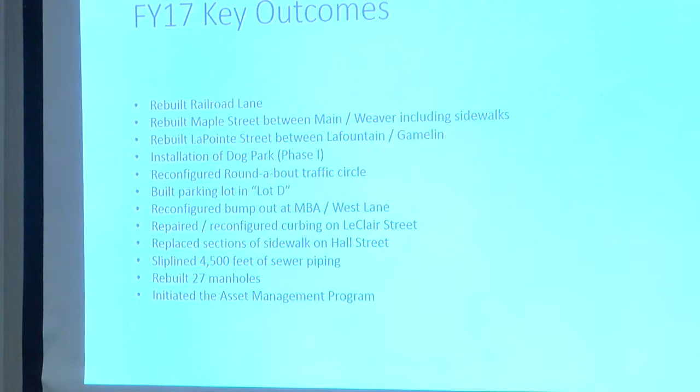For example, rebuilding Railroad Lane. One improvement we made was that the road used to be crowned in the center like any normal road. It's a steep hill, and when it rained, floodwaters would wash out basements and driveways. So when we rebuilt the road, we took those complaints into consideration and regraded it so the water sheds towards the embankment instead. That was a big change, and we haven't had any problems with flooded basements or washed out driveways since then.

Another thing we've done is a lot of our own in-house concrete work now. We used to hire it all out - we'd do the excavation and then bring in a contractor, which typically cost $26 to $30 a linear foot. Because we do it ourselves now, we got the cost down to about $10 a linear foot. So the reconfiguring of MBA and West Lane and the curbing on LeClair Street was all done in-house with our own staff.

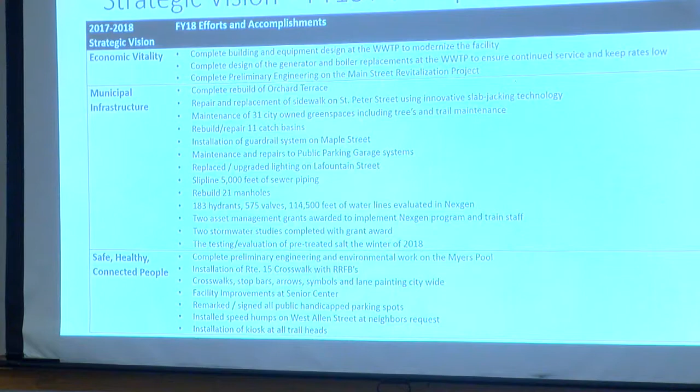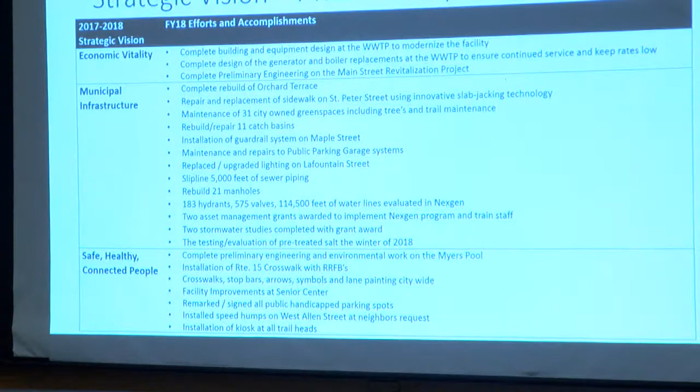One is the complete rebuild of Orchard Terrace. That was done over the summer - June, July, August. It was a success; the three of us managed the contractor from start to finish. We replaced an undersized water main and rebuilt the pavement, which was in very poor condition. We had a lot of positive feedback from residents during the construction process, and we were on schedule and on budget.

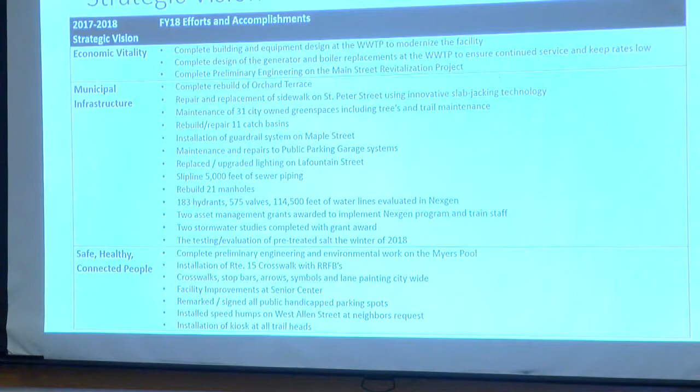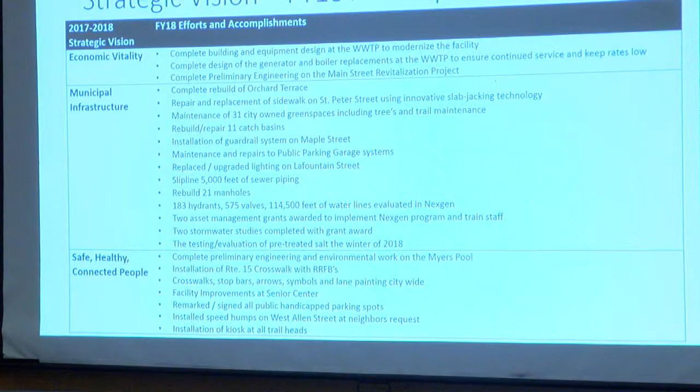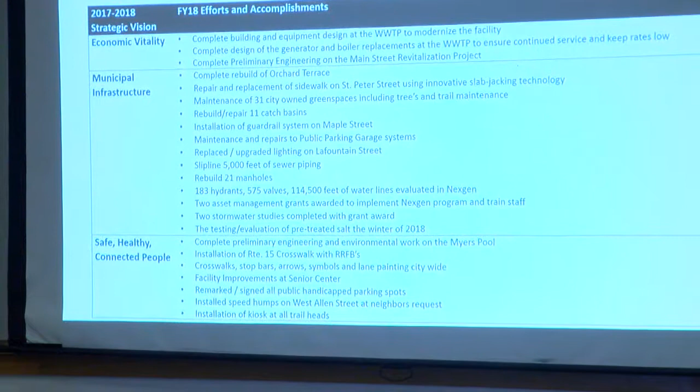Main Street preliminary engineering is ongoing. I'll highlight the drilling we did there - another success. We did about 40 test borings to look at soil, groundwater, bedrock, and contamination in the soil. As you know, this is an urban area with a lot of utilities in the ground, some known, some not. We managed to do all 40 borings without hitting a single utility. That was a major success.

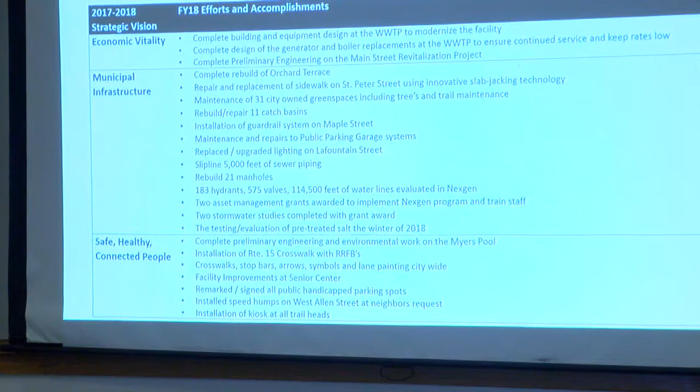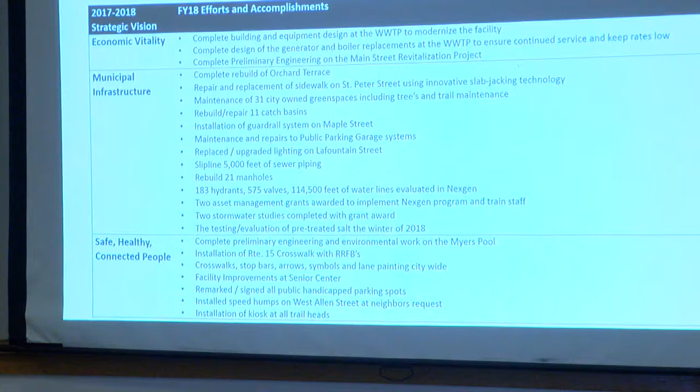The third item I'll highlight is the sidewalk replacement on St. Peter Street. We had a lot of complaints about the sidewalk there, particularly in front of the school - it had settled differential to the curb, creating a trip hazard. We approached several contractors that do slab jacking, something we'd never done before as a city. It involves injecting polyurethane foam under the sidewalk slabs to raise them. It turned out to be a very successful project - 200 feet of sidewalk, and we fixed the differential and corrected the trip hazard for about $4,000. To actually reconstruct and re-pour the concrete sidewalk and curbing would have cost 10 times that, and probably taken 6 weeks, where we completed it in 4 days.

And the last item is the Myers Pool. We're full steam ahead on the engineering design work for that. We've completed the survey and the drilling, and the architect and engineer are currently working on a design, which we may value engineer, but we'll bring forward a cost estimate.

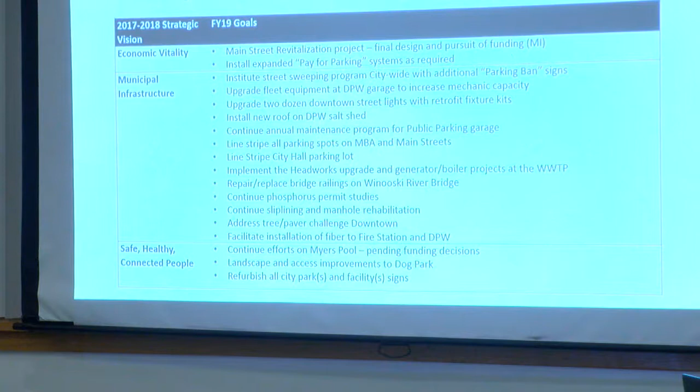We've got 96 pay for parking spots in the city now, and I think code enforcement will be coming forward with some proposals for West Canal and Malletts Bay Avenue for some additional spots in the future.

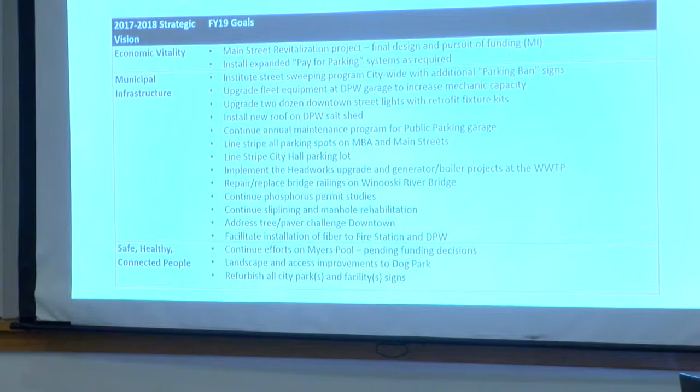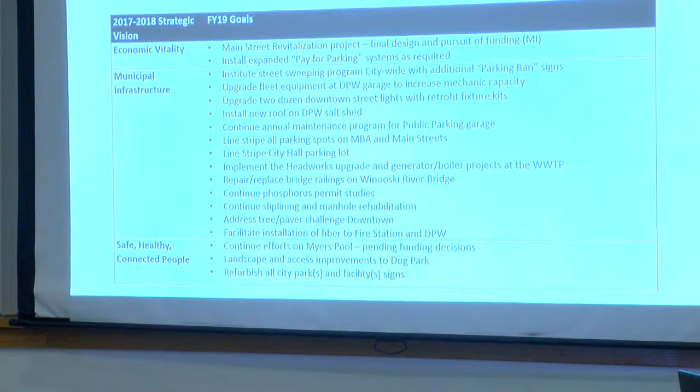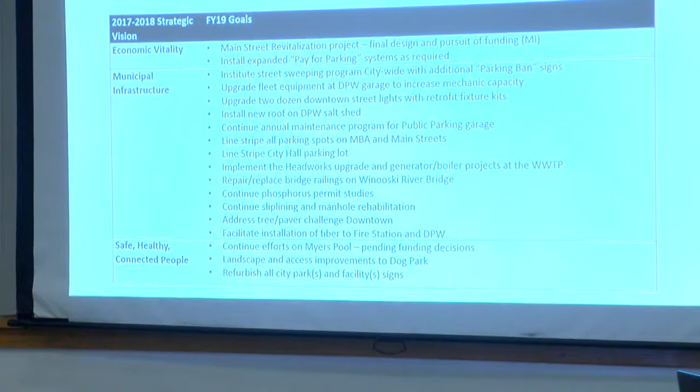Joe and I are working on a street sweeping program. Right now I'm perusing some grant opportunities for a new regenerative sweeper. Ours is dated, it's real maintenance heavy, so we're installing some signs, similar to the parking ban, so we can do street sweeping, breaking the city up into different locations and asking people via the signs not to park so we can get to the curb.

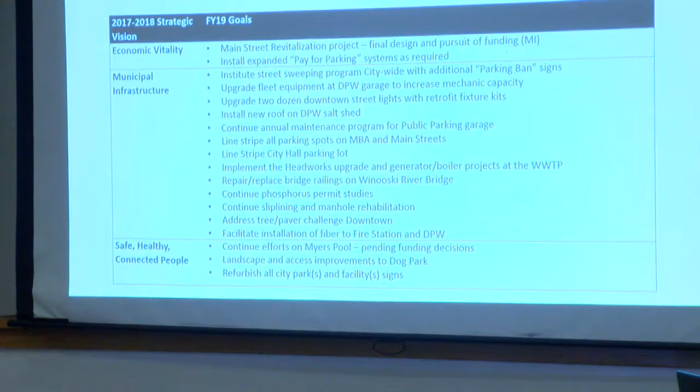We're replacing a dump truck, old number 6. That's the $60,000 that we're spending in CIP in the capital for the general fund.

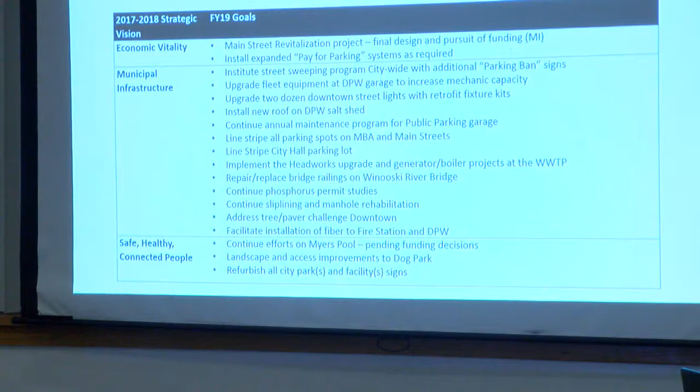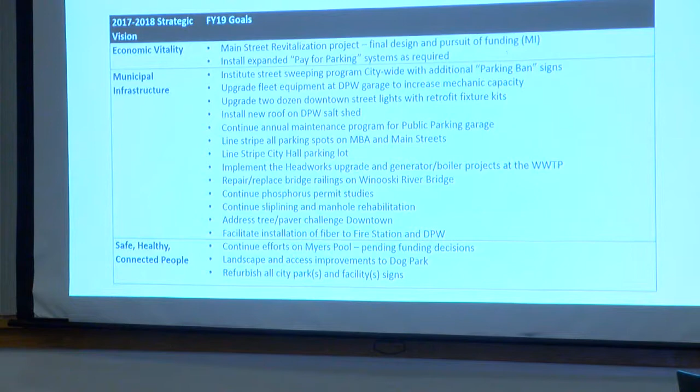The TIF district is going to need to spend $32,000 to retrofit lights. There's a retrofit kit that Joe found — 24 lights now, since we already did 4. So that's what that line item is.

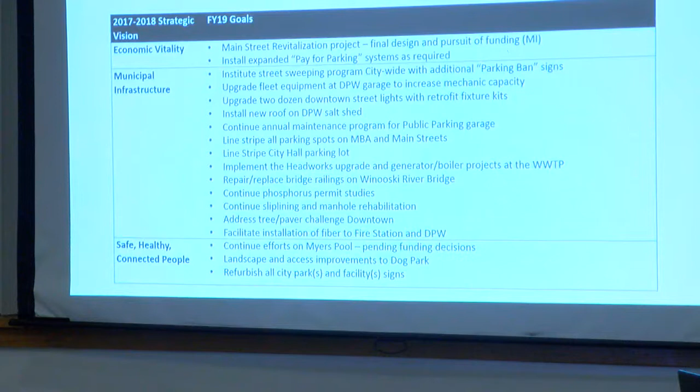Replacing the roof — that's $10K in your CIP budget.

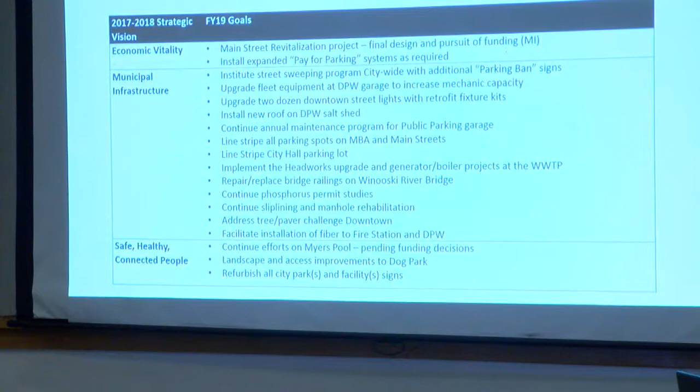We're working with Hoyle Tanner and staff on maintenance in the parking garage, doing line striping all over the city. That's internal.

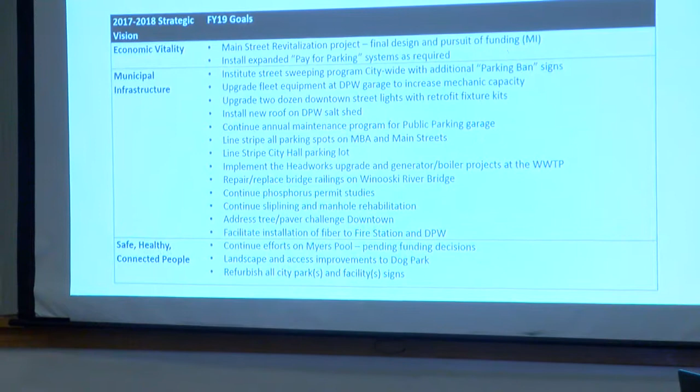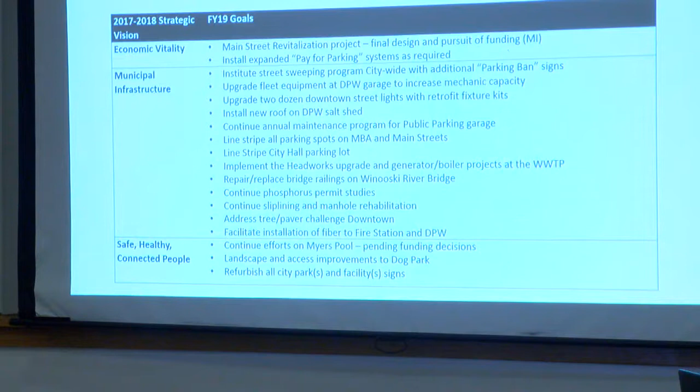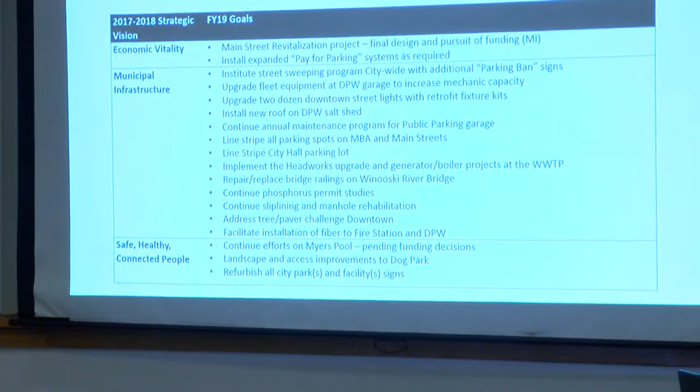We'll talk more with Wayne and myself at the end of the budget presentation about the headworks upgrade proposal at the wastewater plant. But we are full steam ahead putting out RFPs, Ryan and myself, on the generator — that's a natural gas generator and natural gas boiler replacements at the wastewater plant. Right now they're a 1976 boiler, and the generator doesn't power the entire plant. So we've got that in our capital improvement budget as well.

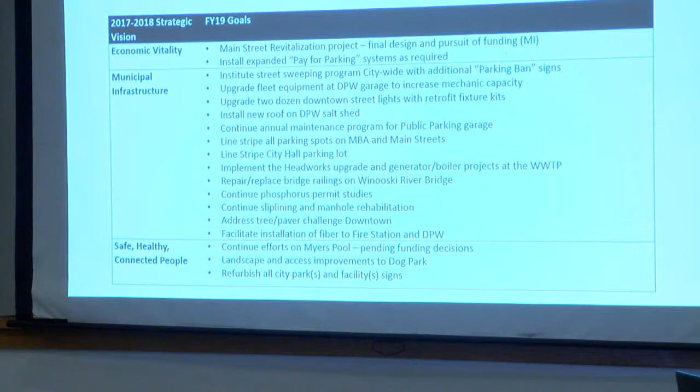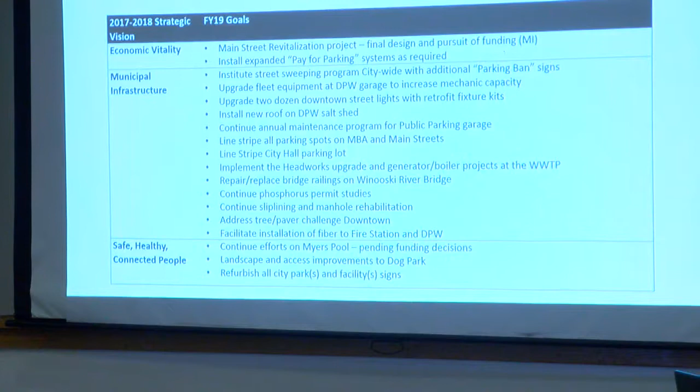Bridge railing — Ryan's got control on that project. We've got 2 grants worth about $375,000, and $20,000 of that is our local share of the grants. So pretty much the north side railing right there replacement, and the east side railing and portions upstream.

Wayne and I will be working on some phosphorus permit studies. Our permit's due in 2020 for the new TMDL, the phosphorus limits. We've got some internal work to do, and the Headworks project could possibly help us in that endeavor, but more to come on that one.

We're gonna do more slip lining, more manhole rehab this summer, like we've done for the last 2 years. It's reaped some real good benefits on tightening up our collection system and bringing them into another 50 to 75 years of use.

Joe's gonna work on the tree pavers downtown. We're investigating some options — you notice the sidewalks are undulating, there's quite a bit of root pushing up on those sidewalks, so we've got some opportunities there we need to explore, because it's another trip hazard.

I don't know much about the fiber, but that you'll find in this coming year. The pool, again, Ray Coffey and company are dealing with that, and landscaping and refurbishing parks and dog parks — it's going to be DPW. Thanks.

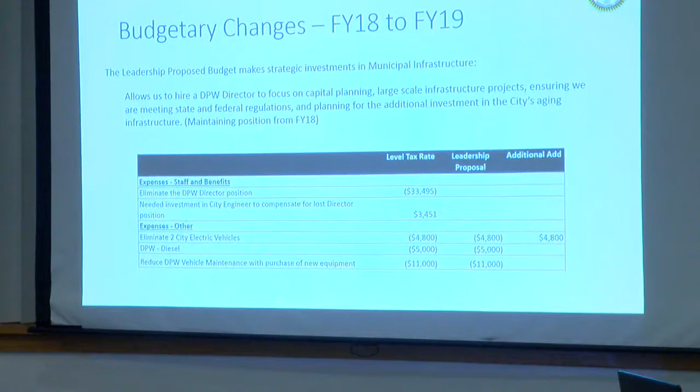In the capital improvement budget you'll see, we are recommending investment of a larger grade lift structure at the Public Works Garage. That will enable our staff to work on all of our equipment, which means we believe we won't have to send as many pieces out for maintenance as we currently do, which is why that line is being reduced.

So then walking through the general fund and the two enterprise funds here, I'm gonna turn this back to Joe.

As the bullets show, it's primarily streets, grounds, and facilities work, and it partially funds engineering work under the director and some of the project work that Ryan is doing. There's a 3% increase from the FY18 budget, based on the new contract we've agreed to with AFSCME, the union — basically their salaries and benefits that cause the increase, and that's what it says at the bottom, so I don't want to be redundant. As another general reminder for the public and council, this is very small on the screen, but if you go to the website to the FY19 proposed budget, you can see this in a full page, clearer presentation.

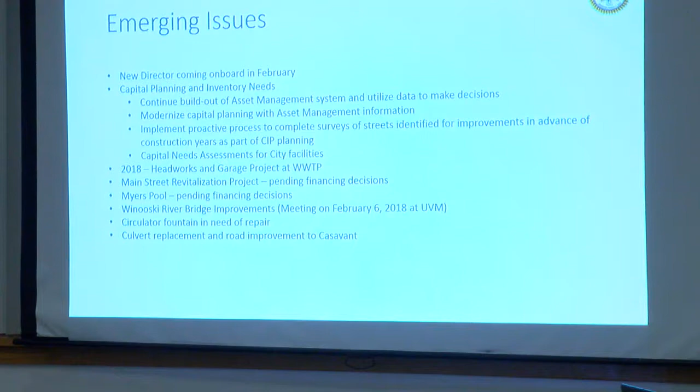You'll hear more about the Headworks project in a minute, and of course, Main Street and the pool and the bridge you've heard a lot about, but are definitely significant public works projects coming up.

What I find really exciting about this, I gotta be really honest, is the group that we tend to see the least is you guys, right? And that's extremely problematic from my perspective, because it's a sign that we have not been doing some of the large investments in infrastructure that we've needed to over the last several years. So it's exciting to see more of you.

From a baseline standpoint though, besides these big projects, the core function of what the city provides is a place where people can live and really have unfettered access to getting to their jobs every day, walking downtown and buying groceries if they want to, going to a bar or restaurant, and 40,000 people plus passing through town every day. And you guys are the engine behind making sure all that is there.

The things that people sometimes take for granted are there and functional, that when they flush their toilet, it goes the right way. When they turn their faucet on, water comes out and it's clear. So thanks for all the work you do, and it's really exciting to see some of these larger investments in infrastructure starting to come to fruition. And we can't get there if you guys aren't able to do the planning and the coordination around that. So it's an exciting place to be.

Thank you. Open up for some questions on the budget presentations. I'll say from a general standpoint, doing the water and wastewater later versus doing them all together is really, really helpful to have them all together. So just from a process standpoint, that was great.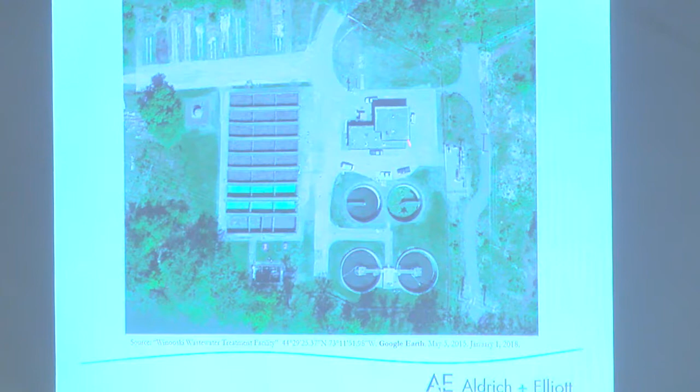So if you've been down to the plant, this is just a brief overview here. This is the drive that extends off from West Allen Street. Currently the flow comes into the plant about here. This is what we call your preliminary treatment, which is what we're going to replace. This is the control building. John's going to talk a little bit about the garage here at the end of this. The treated flow comes down here at the south end and is discharged directly to the Winooski River.

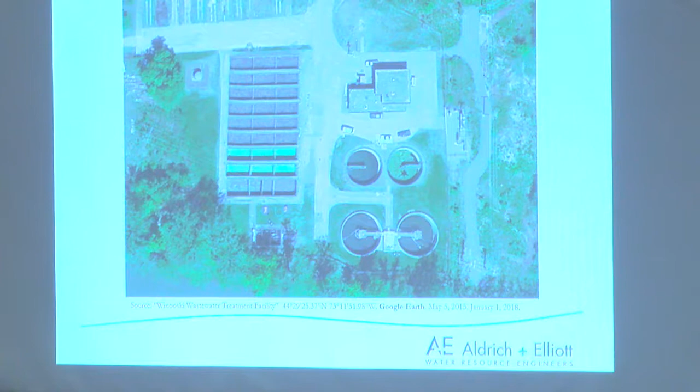This is kind of an abbreviated version - I'm just going to give you a quick overview of what we looked at. Ultimately, the decision point tonight is whether you want to proceed ahead with a bond vote on this in town meeting day. So this is really timely, a discussion about Seth's comments about the work the city's done over the last few years.

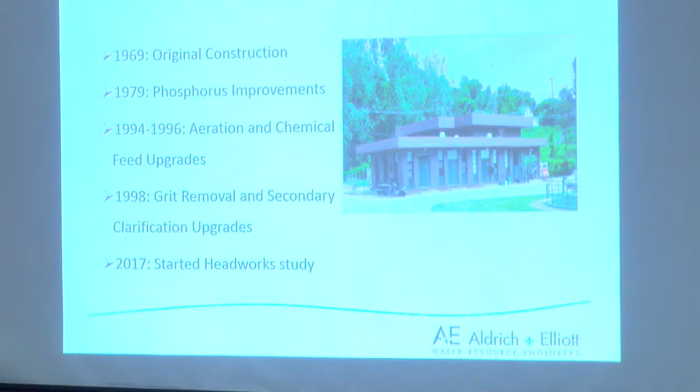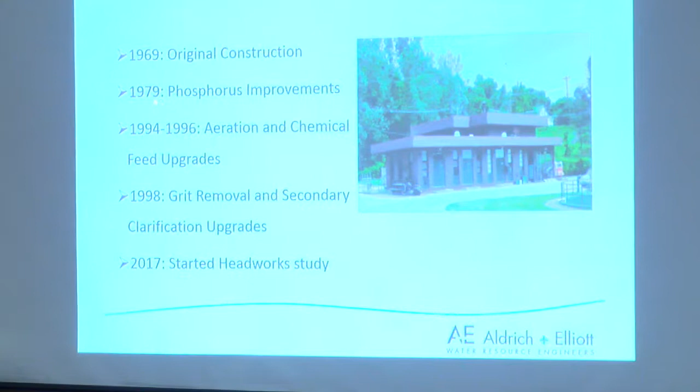One of the things that's important here - this is the original control building, built about 1970, phosphorus improvements done about 1979, a fair amount of work done from 94 to 98. Nothing really done in the last 20 years. That work done in the mid-90s typically has a 20-year, 25-year design life. The city's things have been well maintained down there - generator replacement, a new blower - but as far as large capital projects, nothing's been done down there for the last 20 years.

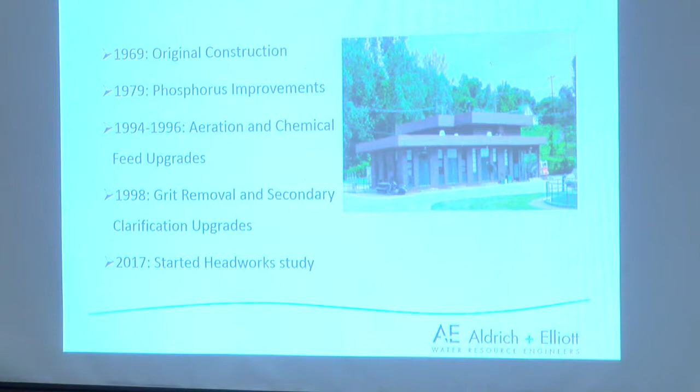So we initiated the headworks study here in early 2017. Generally we're talking about preliminary treatment, which is mostly removing the screenings, the inorganic material, and grit removal. There are a bunch of reasons you want to do that - it's good for the process downstream, it protects the equipment and the pumps, keeps things from plugging. The inorganic material pulled out - plastics, rubbers, those kinds of things - you don't want to carry through the treatment plant. Ultimately that ends up with your sludge and goes to other places. The process downstream also runs much smoother if those things aren't accumulating on the water surface as you work through the different process tanks.

What you have currently for preliminary treatment is a grinder - that's pretty much what it does. The flow comes through the unit and just grinds, chops things up, but it still stays within the flow stream.

It doesn't remove anything. And then you have an older grit removal system, we call it detritus - old, marginal performance. A lot of work was done on that about 20 years ago, so it's reaching the end of its design life. The other thing is, the grit cyclone and the dumpster are kind of outside in a wooden enclosure. It's been like that for quite a few years and it works, but it's not ideal from a permanent situation.

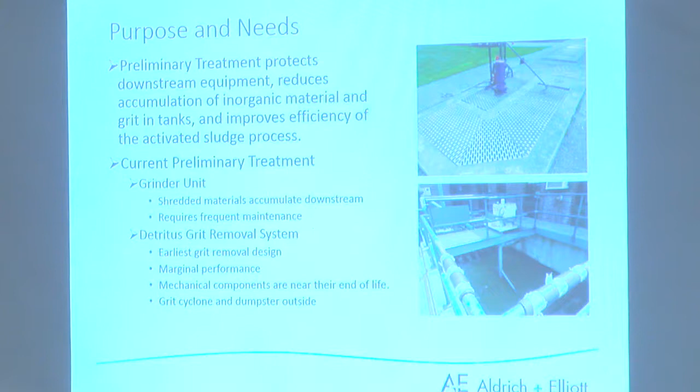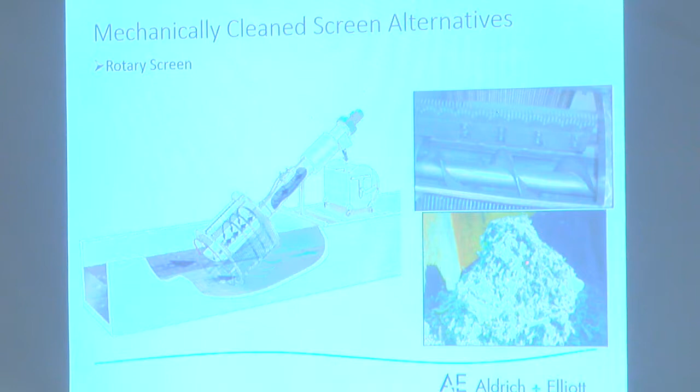With this rotary screen, the flow comes in and there's a basket with openings. You're capturing the inorganic material in the basket while the liquid and organics continue to pass through. Then that material is pulled up a screw conveyor - it's solid, which you can see on the right here. The water passes back out into the flow stream, and the screenings drop into a dumpster for disposal, typically going to landfill.

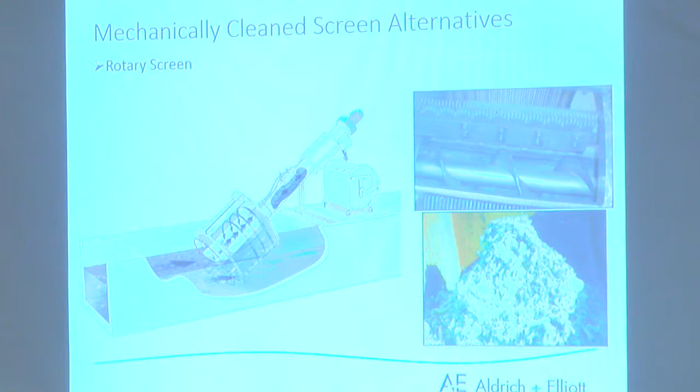Another type that's pretty common in some of the larger plants is what we call a fine screen. You can see the flow passes through 1/4-inch openings, with vertical bars. Same thing - it pulls the material up to the top of the screen and dumps it out on the back side. That's the inorganic material, and it goes into a solids washer, and from there the dewatered material is discharged to a dumpster.

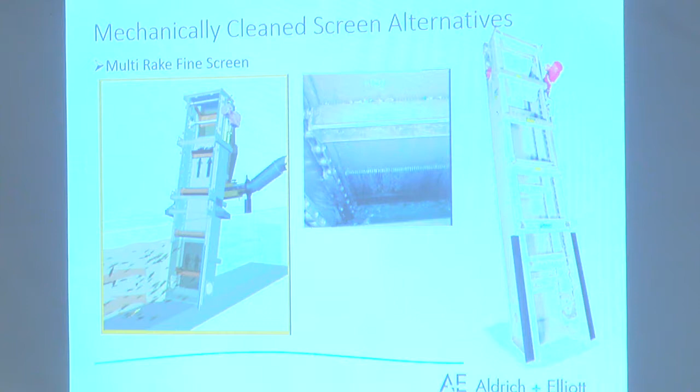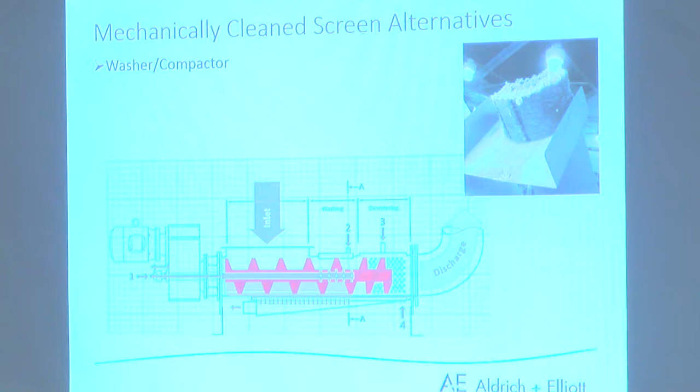This is a neat unit that's become pretty common over the last 3 to 5 years. It goes behind the screen we just saw, and it's called a washer compactor. The inorganic material is dropped into here - you can have a single or dual auger that compresses the material, gets the water back out into the flow stream, and by the time it's pushed out the discharge chute to a dumpster, it's about 40% solids. It almost looks like concrete. It's great for reducing odors and obviously reduces the disposal costs of what's going to the landfill.

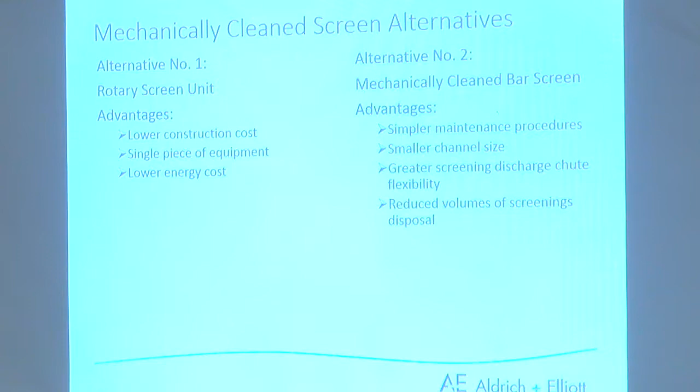Just a brief overview of the different advantages. The rotary screen we saw initially has lower construction costs, one piece of equipment, one motor, and slightly lower energy costs. The mechanically cleaned bar screen, more common in larger plants, is a little simpler for maintenance with a narrower channel, and has more flexibility to push dewatered screenings a longer distance to a dumpster. It's also better for odor control and reduces the volume of material that needs to be moved off site for disposal.

The second part of this preliminary treatment is the Vortex grit system. You have that now, but it's older, kind of dated technology and not as good from a performance standpoint. This Vortex grit system is pretty energy efficient - the water comes in, circles around, and the grit settles to the bottom. It's pumped out and goes to a separate container where it's dewatered and hauled off site, as it is currently.

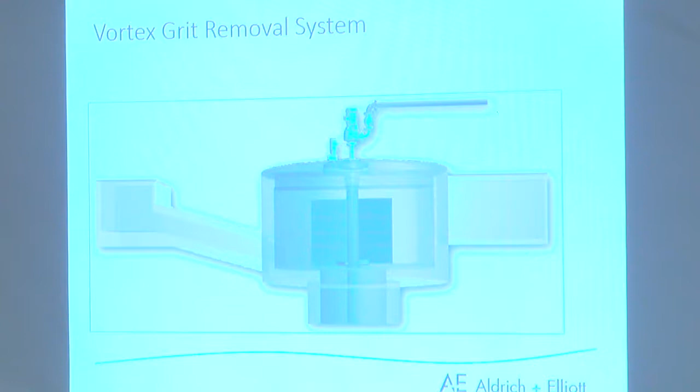So the proposed project includes a new headworks structure, about 20 by 30 feet. I'll show you the proposed location in the next slide. It would have a screen with 1/4-inch openings to capture inorganic material, and Vortex grit removal to pull the grit out of the wastewater.

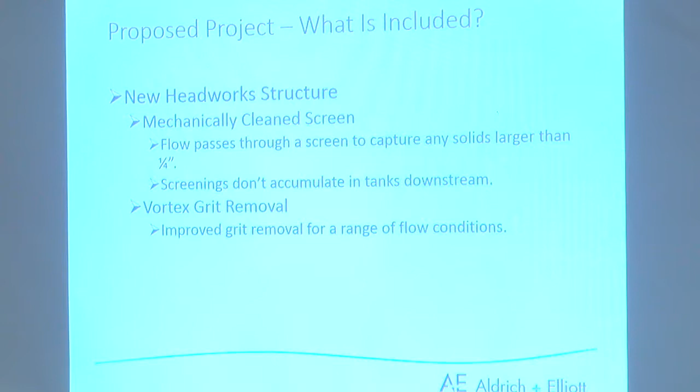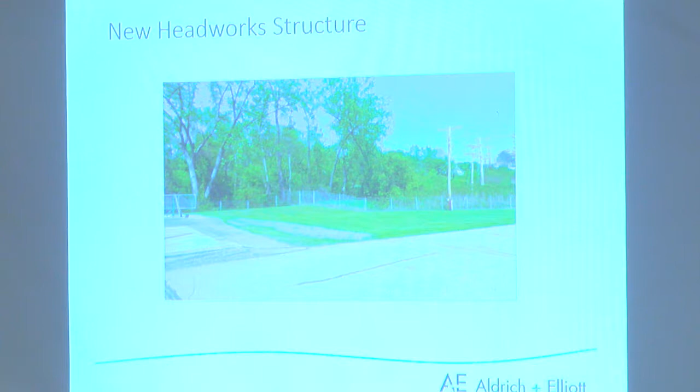This is the location at the north end of the site, with the flow coming in this direction. You'd see about a 20 by 30 foot structure, similar architecturally to the existing control building. It would house the screen and grit removal system internally, and have a dumpster that would be picked up for disposal of that material off site. It would be a classified space, so that has special construction requirements - gas detection and certain electrical requirements to meet NFPA 820.

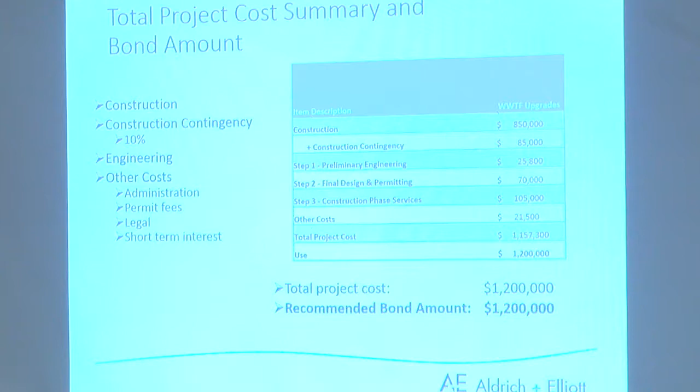So we're looking at a total project cost here of about $1.2 million. For this piece of it, the recommended bond amount is $1.2 million. You may want to choose to add on to that for the garage that John's going to talk about briefly at the end here.

Available funding sources, really looking at the state revolving loan program. This project is on the priority list, 20-year term, 2% interest rate. You can go to a 30-year term, but for this type of work we wouldn't recommend it. The building and concrete really would have more than a 30-year life, but the equipment has a 20 to 25-year useful life, so we don't want you to borrow money for longer than the equipment's going to last.

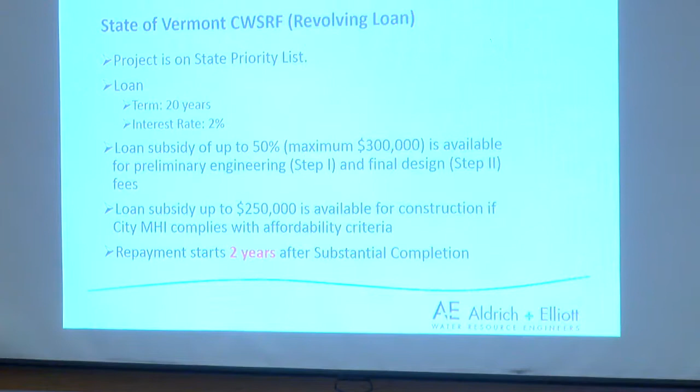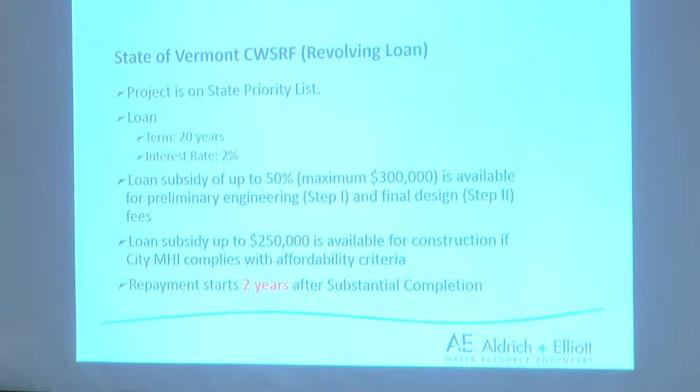One thing that's really neat about this program is because the city went through a qualifications-based selection process for the engineering, you qualify for up to 50% of the engineering work as loan subsidy that you don't have to pay back. Again, on the construction side, you're eligible for up to a $250,000 loan subsidy, and the MHI does meet the affordability criteria.

The other nice thing about this program is the first payment isn't due until about 2 years after substantial completion. So if construction isn't completed until the middle of 2019, that first loan payment isn't due until about 2021.

Just to add to that, as a reminder, the debt service for the clarifier, the final year is FY20, so this debt service would pick up from that capacity. Yep, so that's the biggie at the bottom here as a result of this project. Actually, you have a 0 increase in sewer rates.

Again, $1.2 million for the amount, estimating $315,000 in loan subsidy that you wouldn't have to pay back. You're looking at an annual loan payment of about $54,000 for the 20-year term. Again, no increase in sewer rates.

Schedule here, John talked about this already. I showed a more conservative time frame here, but I think our expectation is if you did pass a bond in March, we'd jump right into the design, contract documents, and permitting. We could definitely be ready to put this out to bid late summer. The only caution is that depending on how busy contractors are, you can get decent pricing and sometimes not.

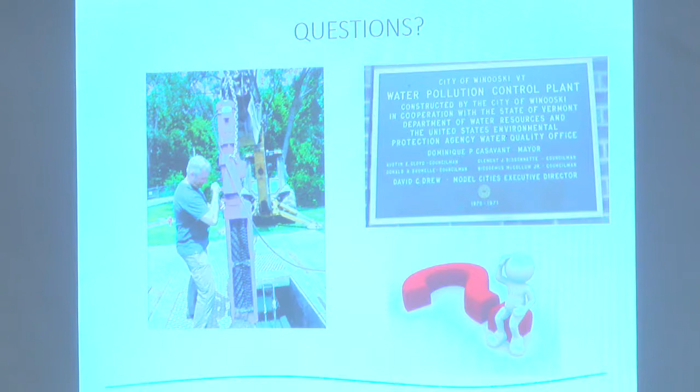What if it was to go out to bid in February, like your timeline, what do you think the completion date would be? It takes longer than you think, and the reason for that is the equipment. By the time you get a contractor on board, it takes a couple months for shop drawings, and in winter it's about 6 months. So the site work and the building aren't really the critical path item, it's actually getting the equipment.

So that's why it could work well if we can hit that schedule and get it out to bid in August, get a contractor on board in September. That way he could get the foundation, site work, and building all kind of done, and the equipment showing up maybe in the February, March time frame, and he can do the install on that.

So, it's usually the equipment delivery timeline that's the critical item here. We're obviously adding process, but doing it in an efficient way, it sounds like.

Do we expect higher operating costs because of this? There could be a slight increase, and it depends a little bit. We try to be as flexible as possible. One of the things we're really trying to do in all these projects is sustainability - energy efficiency is critical. The challenge we have, because of this structure and the exposed wastewater flow, is we need to design the heating ventilation systems in that space to be appropriate for the classification. But what we try to do is set that up so the operators have a lot of flexibility.

We've cleaned the first basin, and we've cleaned the second basin. These two right here are offline because our flows aren't at design yet, so they're green, they just have algae on them. So these four tanks here are loaded. We've got to do those, and it's not a pretty easy job. It's very manual, but we'll get those cleaned in the next two years.

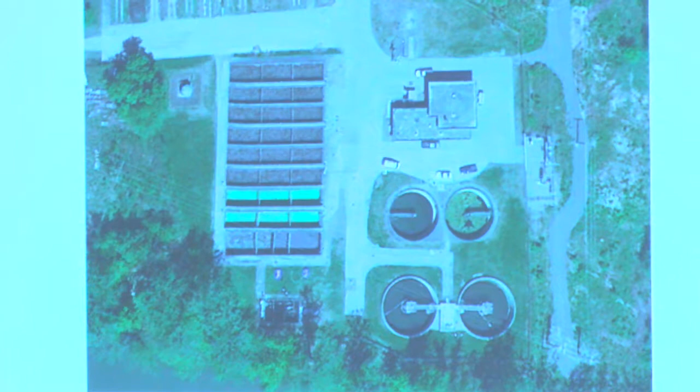So would this constitute a shift to a fully automated system or a more automated system? Fully automated, similar to what the rest of the communities in Chittenden County have. It's kind of unheard of.

Unfortunately, as diligent as we are — I say we, I've done it before, but the guys that work down there, no matter how diligent they are, that stuff is getting through. And of course, we've got an aging workforce too, so the more automated, the less manual, it just makes it easier, and that's generally what most places have gone to over the years.

With the option that includes the solids washer, is there an idea on what cost savings might be in not having to haul away that kind of grit? We haven't got to that point, but one of the things, back to Seth's comment, is we're wrapping up the preliminary engineering study, and so we'll be going through your operating budget. We'll be making some estimates on those for that particular piece of equipment. If there's any savings on the disposal side, we'll look at the electrical costs. Generally what we'll do is take your existing sewer budget, go through where you're at now, and try to project out where you'll be once you get that up and running, so we have a handle not just on the debt side, but any changes in O&M costs too.

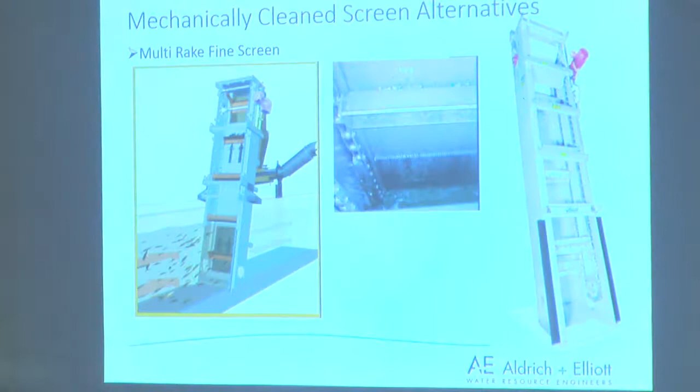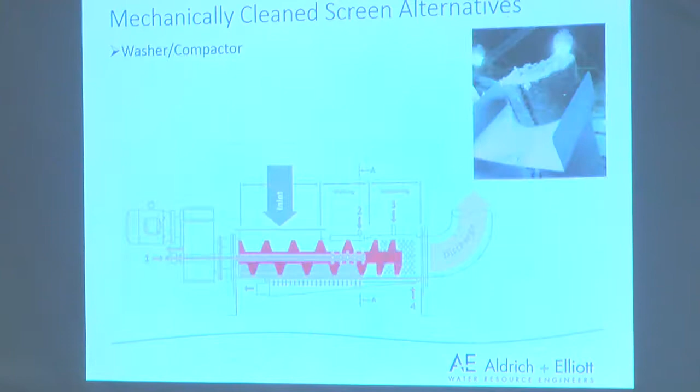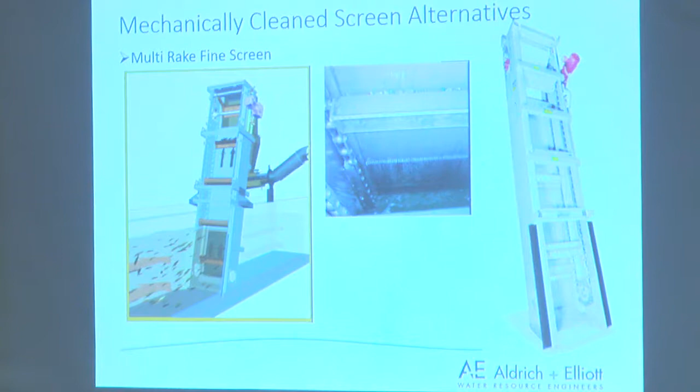So we may push — I think we have, from an operations standpoint — push for that. The downside to that unit is getting them all into one dumpster, the grit and the screenings, because of the way hydraulically they have to be oriented in the building. So we may need an auger, we may need the wash unit, which is another $60,000. So I'm not proposing this unit yet, maybe just an auger as opposed to the wash. But stay tuned, and we'll keep you guys abreast as we zero in on the design.

So you're not fully committed either way at this point? We're not, we're leaning towards this unit though because of its efficiency removing grease. The budget we prepared is based on this type of screen, including the washer compactor. The 1.2 is inclusive of the washer, yes. We just try to be conservative, and we're still working through the details on the options.

Any questions, council?

If we can get a contractor in to build two buildings during the same process, it may incentivize a contractor. There are darn few contractors in the Vermont, New Hampshire, upstate New York area that do this kind of install, but the buildings are very similar, foundations and all, so that may help push a contractor to be a little more aggressive with his pricing if I have two buildings. We're hoping for that, but the climate is a factor. If we're ready with the design engineering, we can build it this fall, or if we have to wait till spring and bid it out over the winter and rebid it again, we can do that. Joe can suffer through one more winter with our tanker trucks and tractor trucks in his garage, but it'd be nice to do them both together, though it may not make a difference.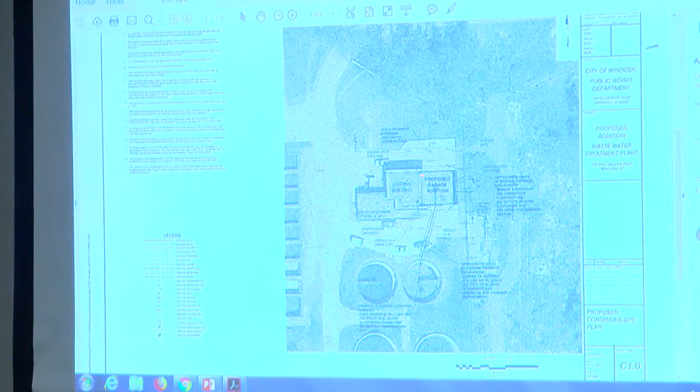This is the design here. So there's your control building right there, that's the new garage location, and then your headworks would be over here. So we would have a garage door coming in this side, and a garage door going out the back side, so you'd still continue with the looping, maybe sized for those vehicles.

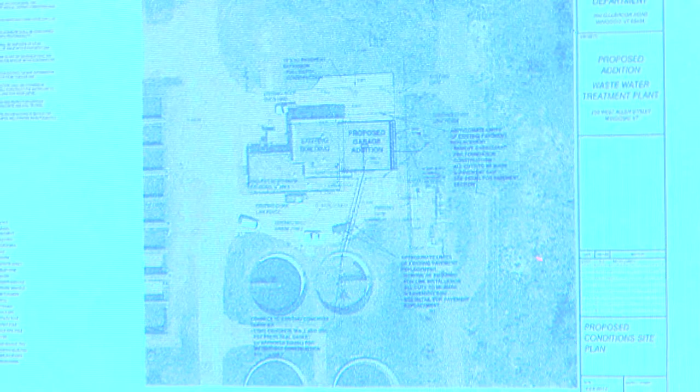So the location is really pretty well set up for this type of garage. GMP's got their transformer facility here. I've spoken with them, and they see no problem with locating it there.

We don't really have any future processes that would go back here or over here, so we've got some open ground there from a footprint standpoint. Not much for buried utilities there. There's not much of anything — the flow line comes down that we would tie into — so we're pretty well set up for this type of facility, both buildings.

Did you get the other one? Yeah, it's pretty uncommon to have that much available space at a wastewater treatment plant site.

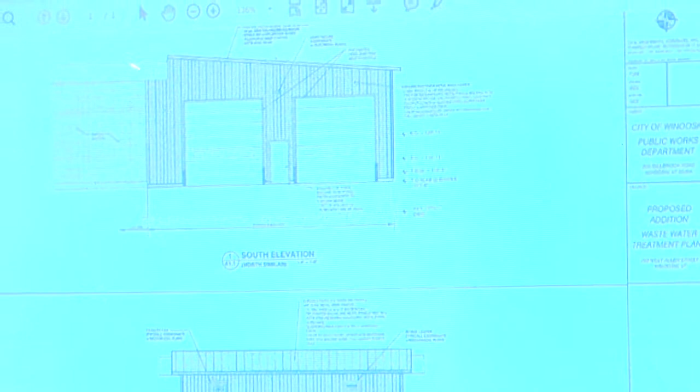This is an architectural mock-up of what we're designing. So there's a parapet right there of the current building — it would tie right in.

Garage doors on one side and double garage doors on the other, and this is facing kind of the only neighbor that we really have — just a couple of quick windows and air vents up here for air handlers. So it's a pitched, single pitched roof.

It's good design, I think it's a decent design for what we need. It's nothing extravagant — we don't need anything extravagant, but we need wash down capability inside and a floor drain so we can wash down vehicles and try to make it into a useful space.

We talked theoreticals, but I don't think we even talked about the funding part of it. It's already designed, can't remember if it's already paid for, it's on paper. There's some money — we put some money aside last year for this building in the CIP. We go out to RFP, and it came in much higher than was put aside, so the idea now is to use this opportunity to do both instead of doing them separately.

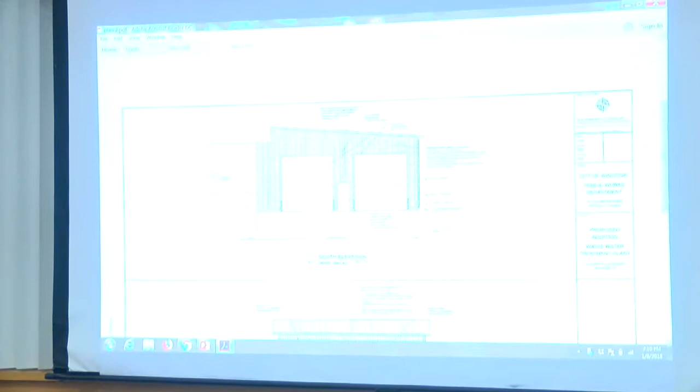You see how that's got a single pitch on the southern exposure? It would seem to me that that could be incorporated there. There's not a lot of land that is encumbered from a line of sight and sunlight, other than the back, but Joe uses that for snow removal, a snow dump. So it's very potential — I mean, it's a 50 by 40-foot garage, so it's not a small footprint.

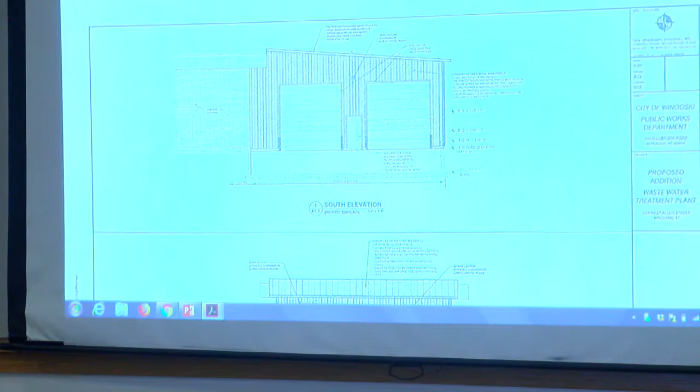So putting some panels up on that southern exposure was thought of, and I've got some meetings with contractors to try to sharpen our pencils on this design, and ask them what they think about solar panels on the roof — certainly making it supportive for that. Great catch, Eric, thanks.

Feed it right into the Green Mountain transformers right there, right? Tie it right in. Other questions? Comments?

It's exciting. I know, from a service perspective, this tends to be one of the last things people think of—the last stop when something goes down the drain. But from a forward-thinking, plant sustainability, long-term perspective, it's exciting.

Really exciting. We're trying to do it incrementally too, not just a big upgrade, but trying to be smart about some of the upgrades and staggering them if we can, and appreciating the impact this has on the other equipment—helping it age more sustainably.

Any other questions, comments, concerns from the public? Where do you go about wastewater right now? It's so fascinating to hear. It's great to hear your expertise down there too. John gives a great tour.